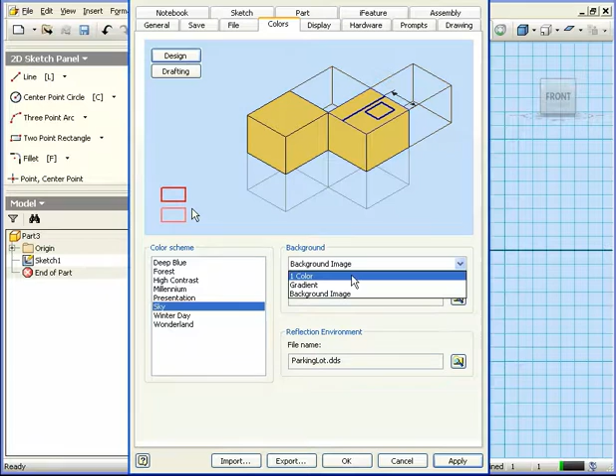Now let's go to the Sketch tab. Here I can opt to display grid lines, minor grid lines, and axes. Let's click Apply to see how the graphic area looks without grid lines, and let's restore the grid lines now. Apply. Let's restore the minor grid lines as well as the axes now.

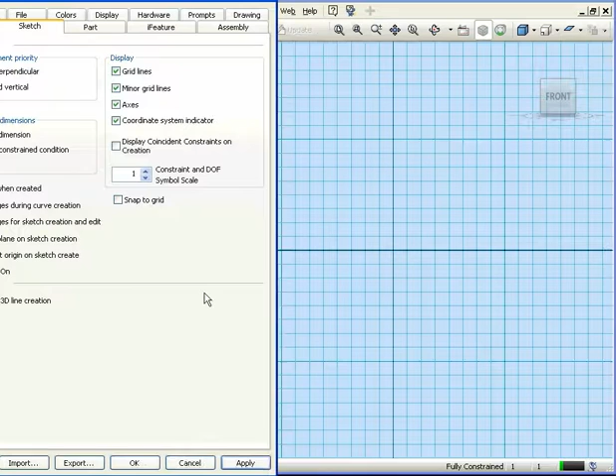Apply. If Coordinate System Indicator is checked, the origin point will be displayed in your graphic area. Let's uncheck this box and then Apply and Close.

Now let's go to Tools again, but this time we'll select Document Settings. Click on the Units tab. In my case, I'll be using inches, imperial measurements for length. Under the Angle drop-down menu, let's choose Degree.

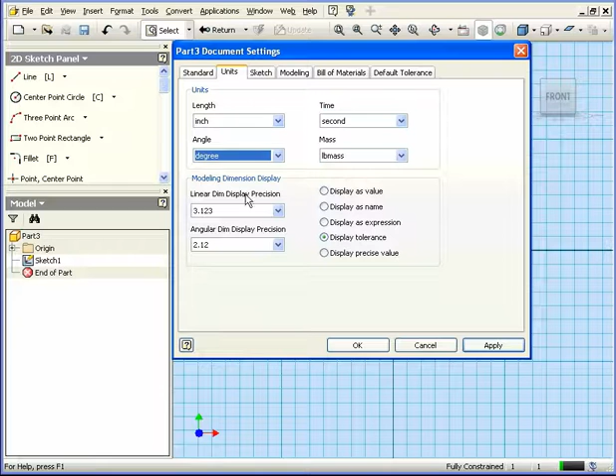OK, one more thing, let's go back to Tools, Application Options, and select the Part tab. Let's look at the New Part Creation control area. You see that I've got Sketch on XY plane checked.

Because I have this box checked, I ended up in sketch mode on the XY plane. A Sketch 1 was already pre-created for me when I created this new part. Next, in the panel bar, I'm going to select the Line tool.

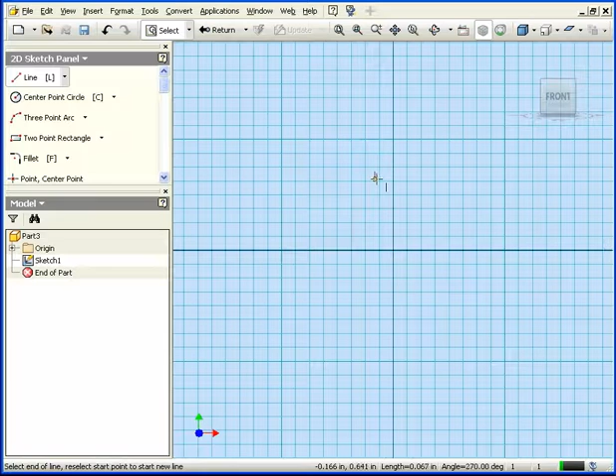Let's create a simple shape here. Something like this. After I've finished, I can press the Carriage Return or Enter button on my keyboard. I can also simply right-click and select Done.

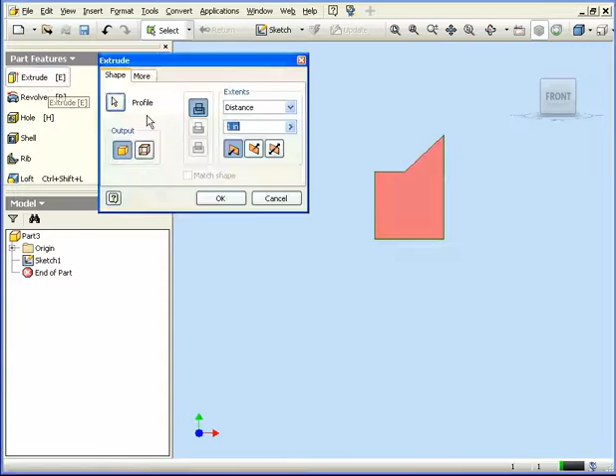Now I'm going to use the Extrude tool. I can click on the command here, or I can press E on my keyboard. Let's rotate our model a little using the View cube.

Here we can specify the extrusion parameters, and when I'm ready, I click OK.

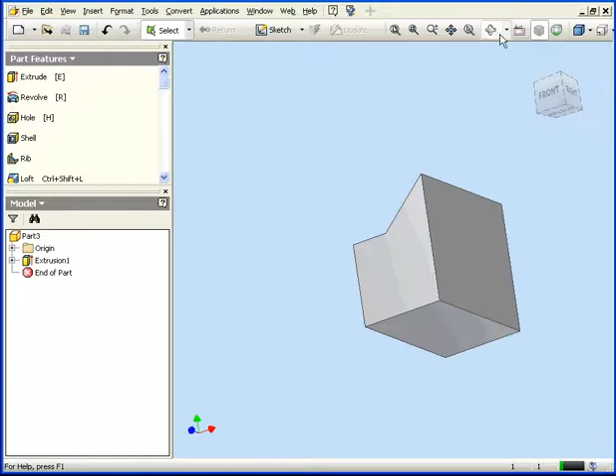To rotate our part, we can use the Orbit tool. Let's check out the Orbit tool. There's another way to do this — we can use what's called the View cube. We simply place the mouse in the region of the cube and then click.

I'd like to remove the compass from the View cube right now. Right-click Options and then uncheck Show Compass and click OK. By clicking on Home, we'll go to an isometric view.

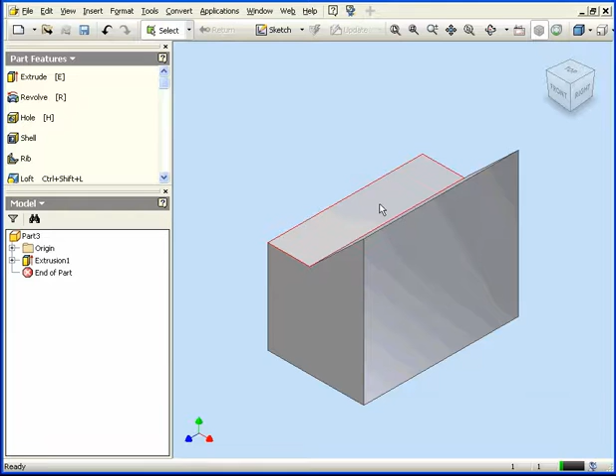To make modifications to the sketch, I can right-click on the sketch in the browser and select Edit Sketch. Let's make some minor changes. Now when I'm finished my changes, I click Return. Inventor accepts my update. Since we're working in a parametric environment, the shape of our solid has changed automatically.

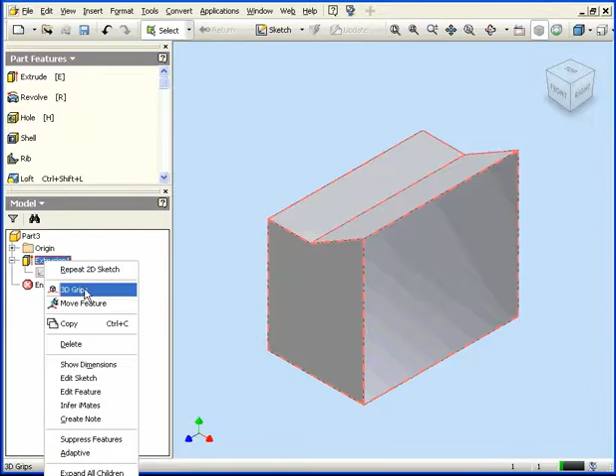To edit a feature, let's check Extrusion 1 in this case. I right-click on the feature in the browser and select Edit Feature. Let's make some minor modifications. We'll be learning more about this Edit dialog window later on. We click OK, and Inventor accepts our update.

Now to create a new sketch, let's say on this face, I can simply right-click and select New Sketch. As an alternative, I can click on the Sketch button in the toolbar. Let's select Undo, and let's deselect everything in our graphic area.

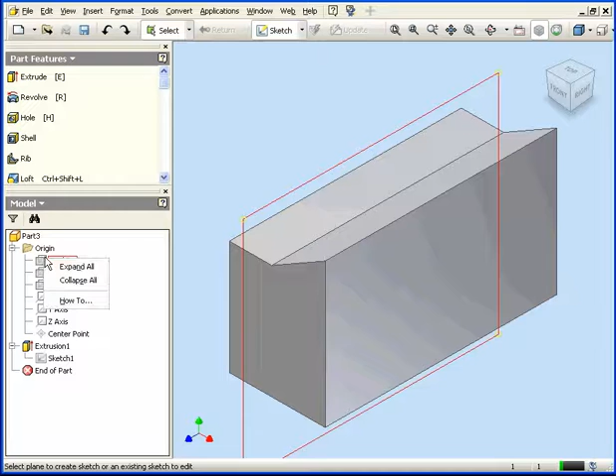Let's create another sketch. We'll press the Sketch button again. Now I need to specify the sketch location. I can use faces, surfaces, or planes for my new sketch. Currently, I don't have my planes visible, but you can make your planes visible. Let me show you how to do that.

Select the plane, right-click, and select Visible from the drop-down menu. Easy enough. The same principle applies for sketches as well. Right-click and select Visible, and we see our first sketch.

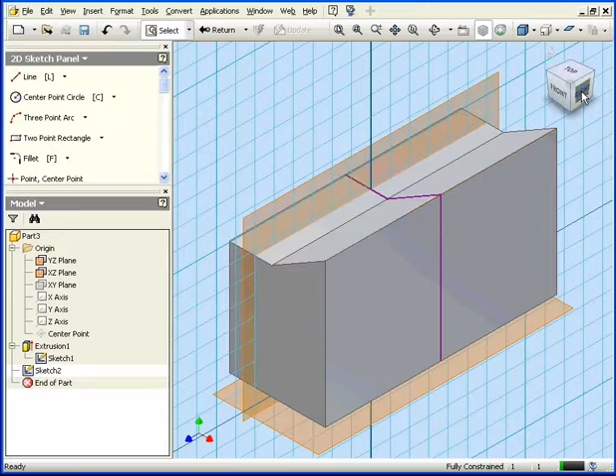Next, let's go to a normal view by clicking on the right side of the view cube. I'm going to activate the Circle tool and create a circle right about here on my graphic area.

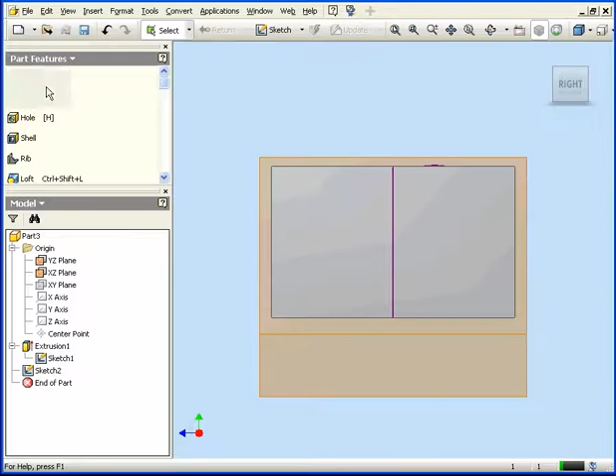Exit the sketch by clicking Return. Let's create another extrude now. We'll select this region right here. We make our necessary modifications and click OK.

At this point, we of course need to save our part. Select File from the main menu and click Save. Now we specify the location and click Save.

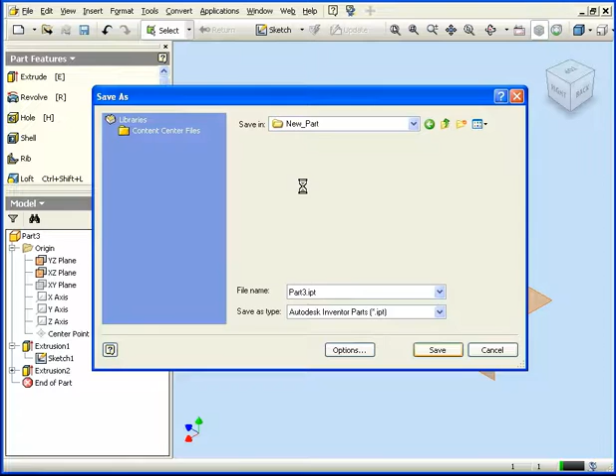There's a couple more things I wanted to show you in this tutorial: the 3D Grip tool and the Move tool. Right-click on Extrusion 2 and select 3D Grip. Let's grab and drag this handle.

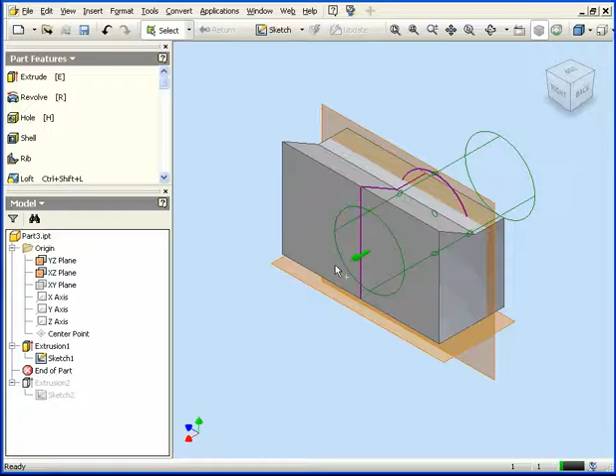That's how we can change the length of the extrusion. When you're done, simply right-click and select Done.

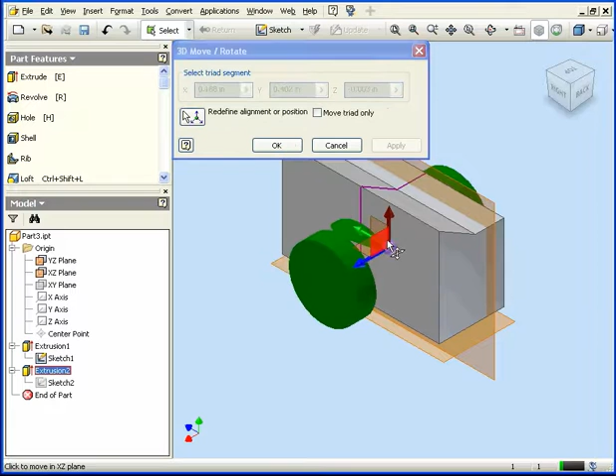Let's right-click now and select Move Feature. Now let's drag on one of the handles and we can reposition along the axis or the planes. We can also simply freely move it if we want to. And when I'm done, I click OK.

And this concludes our introduction to Autodesk Inventor 2009.